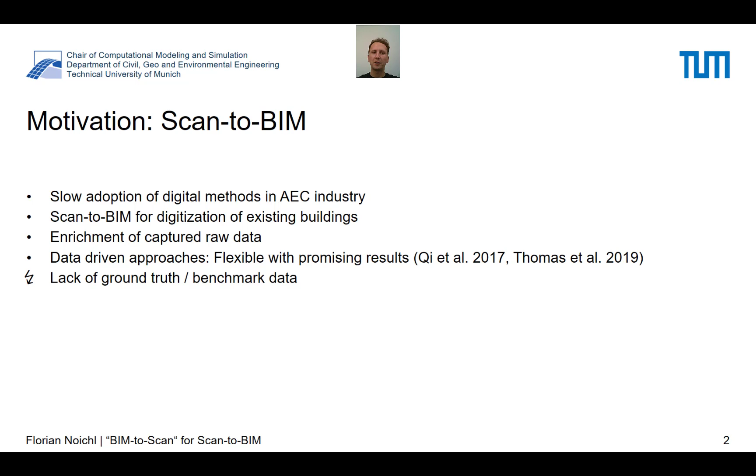If we want to apply such architectures and methods to our domain, we find that there is a big lack of ground truth and benchmark data. So we just don't have enough annotated point cloud data to apply to our domain. So the main motivation for this project is the shortage in data, because the available amount and quality of annotated point cloud data that we can use for development and testing of our approaches is just too low.

Although scanning equipment has become more and more affordable and well performing recently, the content of the scans that are done, especially in the industrial context, is so sensitive that it is rarely publicly available. Operators of facilities fear for the secrets in the industrial environment and for the privacy concerns of their employees, and therefore rarely publish their data.

To face these facts, we identified the opportunity of using 3D models because they are actually common practice across many industrial sectors. Last year, there was a publication shown here that showed the usefulness of synthetic data for applications of semantic segmentation, in which they used 3D models as just sampled points on their surface and could show a significant improvement of the precision of semantic segmentation networks.

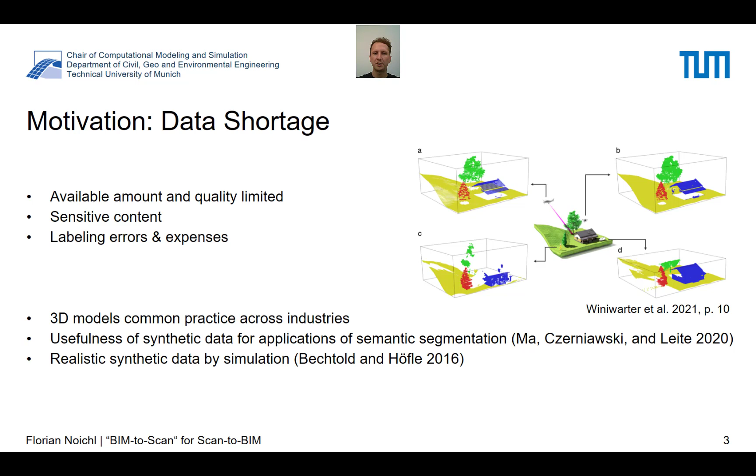Furthermore, we decided to go with a more realistic synthetic data approach by using the simulation tool of Helios that was published in 2016. To put our approach into context, I would like to explain how it fits into our understanding of the digital twin concept. So we start from a real asset where we capture the actual as-is conditions using a laser scan, mostly. Therefore, we transfer the as-is conditions from the physical to the digital domain.

With the resulting laser scan point cloud, we can then, depending on whether we have an existing model or not, use methods of Scan-to-BIM or Scan-versus-BIM to create or update a digital model. To close the loop and really make it a digital twin, of course, we need to enable the bidirectional flow of information and include the decisions that we make based on the information that is contained in our digital twin.

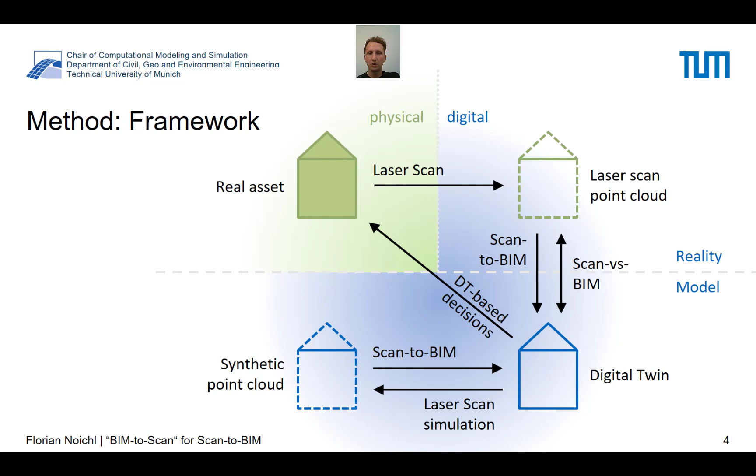Now we extend this rather comprehensive and well-known definition by our own, where we introduce the laser scan simulation into the loop. By doing a laser scan simulation on the 3D model that is part of our digital twin, we create the synthetic point cloud. And this, in turn, we use to develop methods of Scan-to-BIM and to test them, because this data, as I said, is much easier to generate and much cheaper for us to get our hands on than the actual real laser scan point clouds.

The toolchain we use for this is composed as follows. We start from a model authoring tool, where we are not vendor dependent, where the actual 3D model of the facility is created. In this study, we have tried out Bentley MicroStation and Autodesk Revit for this purpose. We then, depending on whether we have semantic information in this model or not, use the IFC or FBX formats for model export out of the model authoring tool.

This exported model is then imported into Blender, where we prepare the model for further steps. To be more precise, in Blender, we make sure that every object in this model actually is assigned with proper semantic information. If the original model had semantic segmentation already, this can be parsed out of the imported model automatically. If not, for example, if we have a pure 3D CAD model as an import, we need to follow up manually.

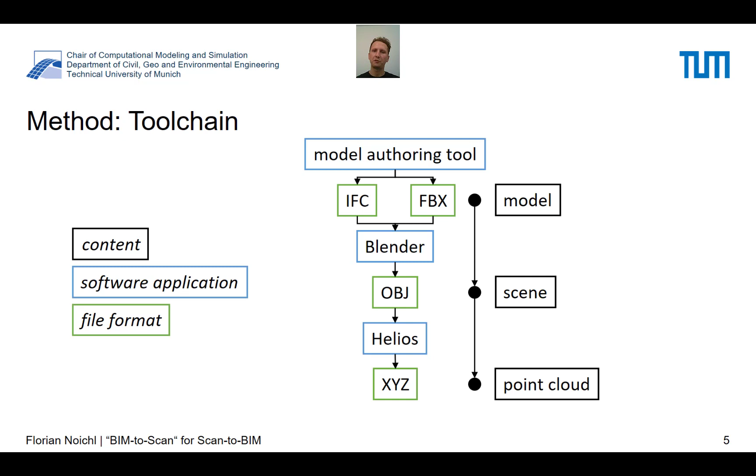We then export this model to a scene of Wavefront OBJ files that can be directly imported into the laser scan simulation tool of Helios, where we subsequently perform the actual laser scan simulation. This results in a fully annotated ground truth point cloud, which means that every point comes with a class label, which is derived from the object that we prepared in the Blender application.

After completing the toolchain, we wanted to make a comparison between the real and the synthetic data. To do so, we did a case study in an industrial facility and subsequently performed a laser scan simulation using the 3D model of that same facility. We used the same scanning locations and also adapted the same scanning parameters that the manufacturer provides for the equipment that we used for the laser scan.

The figure here shows a snippet of the real laser scan point cloud with RGB values as captured in the facility on the left, along with the result of our laser scan simulation, where the semantic classes are color-coded, on the right side. The comparison side by side shows a number of similarities, along with a couple of differences in the point clouds.

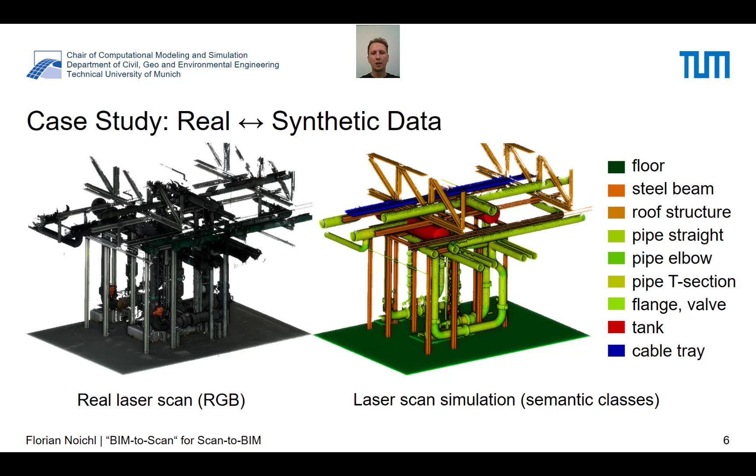What we can already see here, in this high-level comparison, is that we succeeded to introduce realistic occlusions into the resulting point clouds. In the next steps, we looked into the resulting data in a little more detail.

To go into more detail, we chose a part of the model where our as-designed model and the real facility actually aligned quite nicely, which was not the case for all areas in this facility, unfortunately. On the left side, we can see the part from the real laser scan, and on the right side, we can see the corresponding parts from the laser scan simulation.

While the real data has colors, shown here in the left snippet, we color-coded again the semantic classes in the laser scan simulation point cloud. I apologize for not using the same color code for the classes as in the previous slide, but the differentiation between the single classes should be clear.

Now to actually investigate the point clouds, we calculated the surface density for both point clouds. And this is color-coded with the same scale for real and laser scan simulation point clouds. And we can see that our simulation tool does a quite good job in doing this point distribution per surface in a realistic manner. So we can see that the surface of the pipe that is facing the scan direction actually shows the highest density in points per surface, which is also, of course, what we would expect.

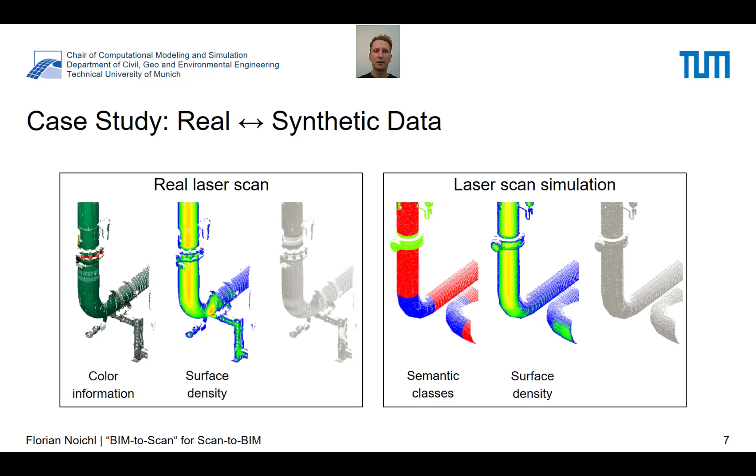Also, other surfaces that are not directly facing the scanning location show a much lower distribution of points, and the surfaces that face away and are hidden from the scanning location are actually occluded, as we can already see in this.

Finally, we calculated the distance of cloud to model for both the real laser scan and the laser scan simulation. Of course, for the synthetic point cloud, so the laser scan simulation result, this results in a pretty uniform distribution, as the underlying model is exactly what goes into the simulation, and we used the same color scale for both evaluations. So the much more interesting result in this regard is the cloud to model distance for the real laser scan.

What we can see in here is, for one, that the actual geometry of the facility as it is deviates from the as-designed model in a couple of ways. For one, we can see that the second pipe run that is modeled in the lower right hand side is just not present in the real facility. In turn, we have this kind of secondary structure that holds this pipe run, which is just not modeled in our as-designed model. Also, this pipe clamp and valve in the vertical part of the pipe are modeled only very roughly and in a slightly wrong location.

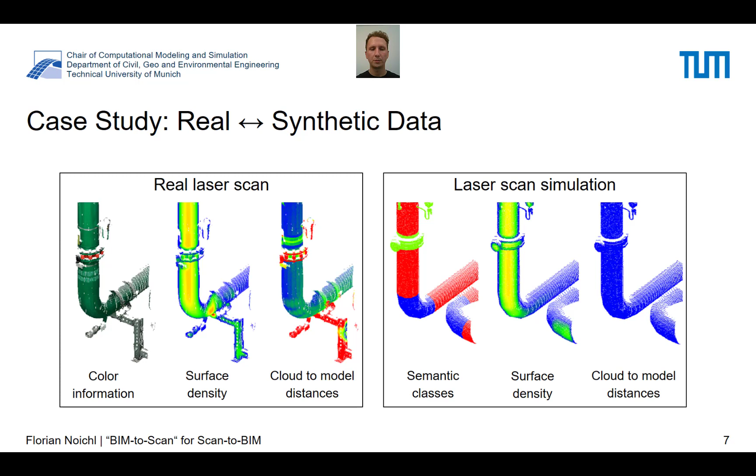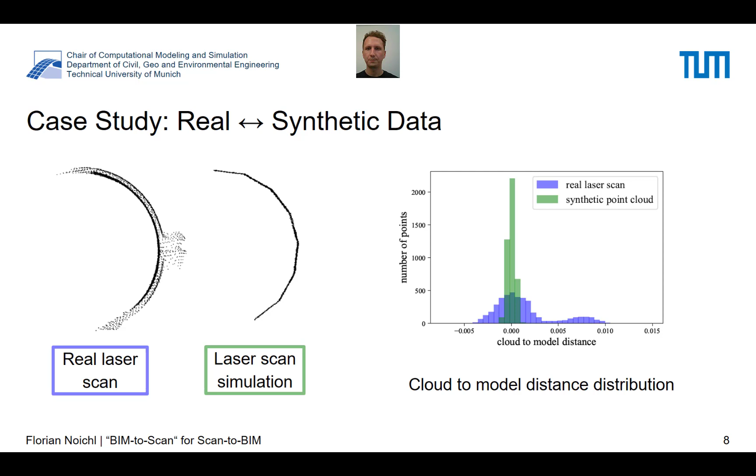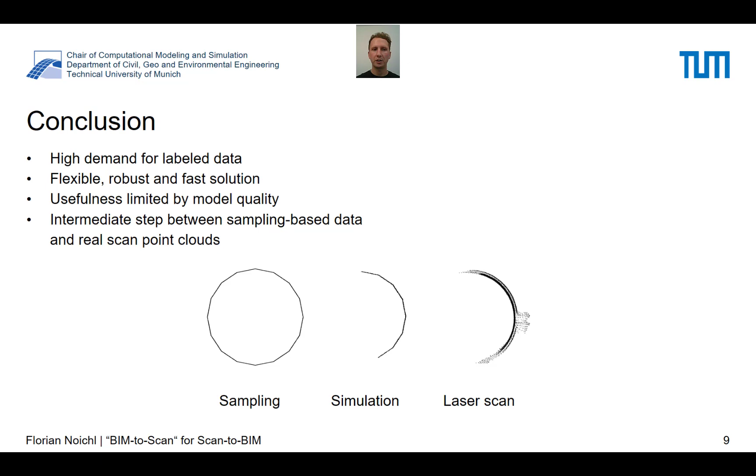Finally, to sum up our insights so far, we had a thorough literature research and identified that there's a high demand for labeled data. We identified Helios as a flexible, robust, and fast solution to create such ground truth data sets based on 3D models. But also we identified that the usefulness of the created data is definitely limited by model quality. To sum up, we find our approach to be a good intermediate step between sampling-based data generation and real laser scan point clouds, as shown below.

As of now, we are using the synthetic data for training and testing with different neural networks for semantic segmentation. In the next step, we are testing approaches for semantic segmentation that have been trained purely on synthetic data on real laser scan point clouds. Then we also want to compare our results with the already known sampling-based methods to quantify the performance. And then we also want to investigate the influence of training on combined datasets with real and synthetic data.

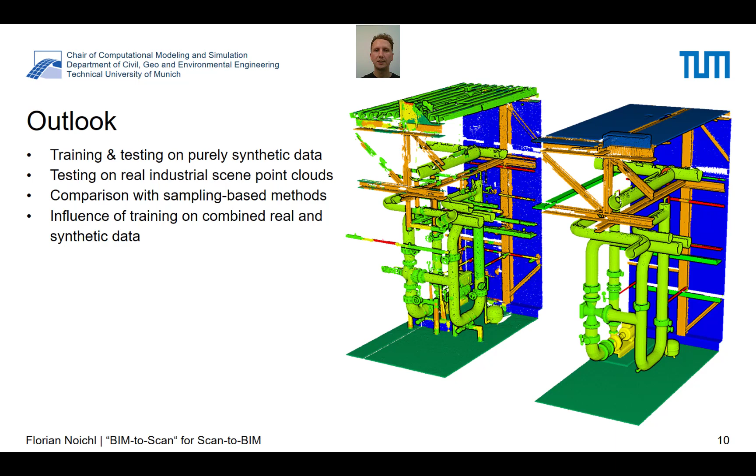As an outlook, on the right side of this slide, we included some first preliminary rough results. On the very right, we can see label predictions on testing data taken out of synthetic data for a network that was trained purely on synthetic data, which shows quite nice results. And in the middle of this slide, we can see the prediction results for real laser scan data, again, for a network that was purely trained on synthetic data. We can see here that it's, of course, not as clean as the results for the synthetic data, but yet promising. And we definitely look forward to find out more about this and also to present further results, hopefully soon.